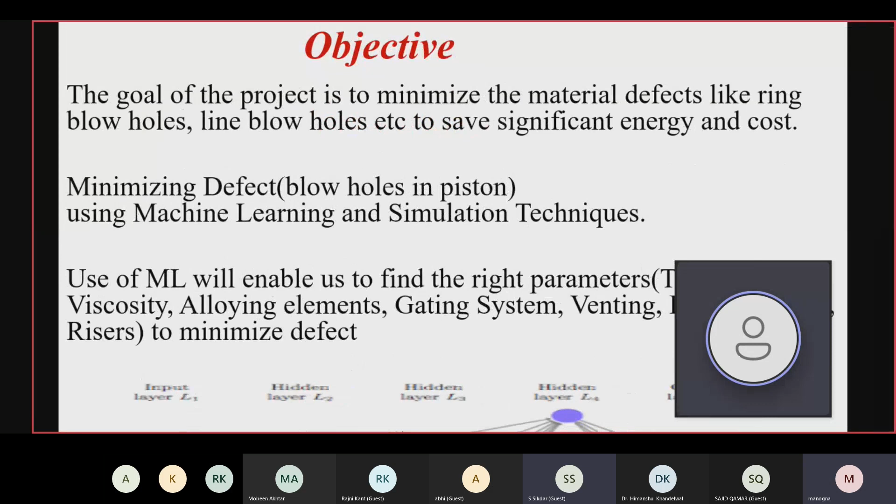So we have done the simulation techniques, and we have also used the machine learning part. In this we have taken into consideration the parameters: how many pistons are inspected, what is the scrap, what is the temperature content. We also considered things which we didn't include in the machine learning, the gating system, the venting angle and the tilt angle.

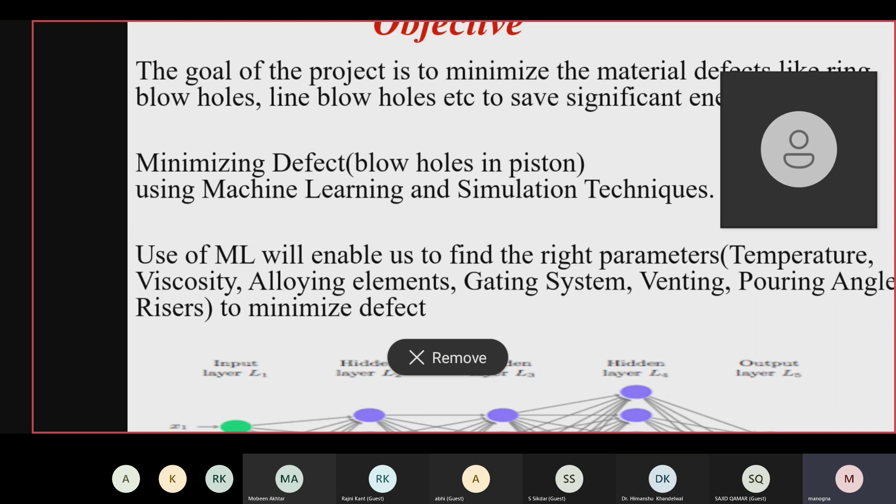We didn't include them in the machine learning part because the angle is set, and the gating system is also fixed at a particular position, so we don't change it every single time, but temperature can vary, and the scrap also varies. So that is why we have not taken the gating system and the tilting angle into consideration in the machine learning part. You can see this part, right, sir? Venting, pouring angle and all. No, actually.

Is it okay now? Yeah. So you can actually, I don't know, you can cross this, na? There is a cross button, I don't know. Now you all can hear my voice also. Yeah, we can hear you, we can see this presentation, full screen.

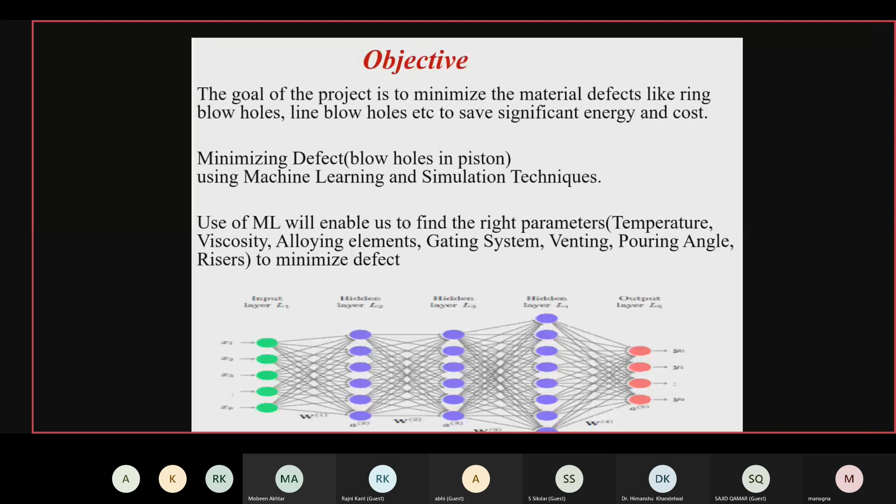Yeah, then that's fine. So the points which were considered for the machine learning are temperature, scrap, and inspection. The points which we have done in the Magma simulation are gating system, venting system, and the pouring angle. So as you all know, what is a piston? Piston is a component used in reciprocating engines. It is basically used in the cylinder parts. So it is also known as the heart of the engine.

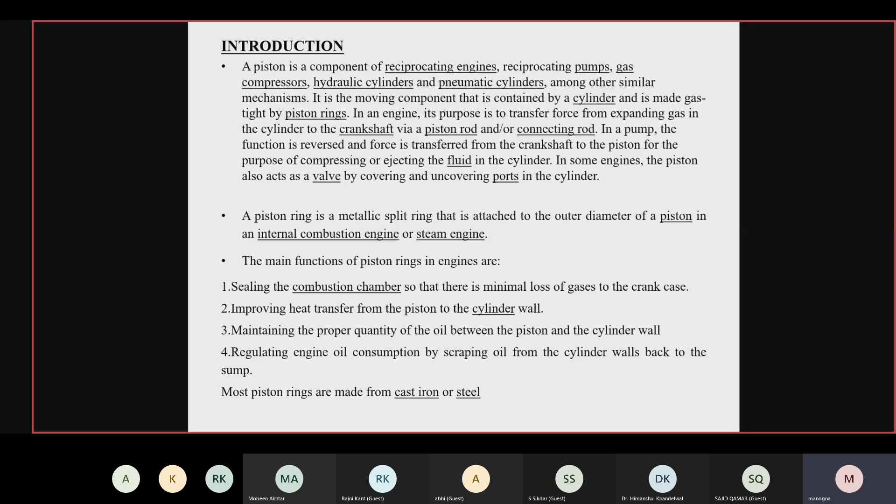So the place where we were doing this project on was the ring area. You can see this is a piston crown, sir, and I don't have a cursor to show, but at the top crown, the top compression ring, second compression ring, and the oil ring. These three parts are the rings where we are getting lots of blowhole scrap. Blowholes or the line defects, which are basically due to air bubble entrapment.

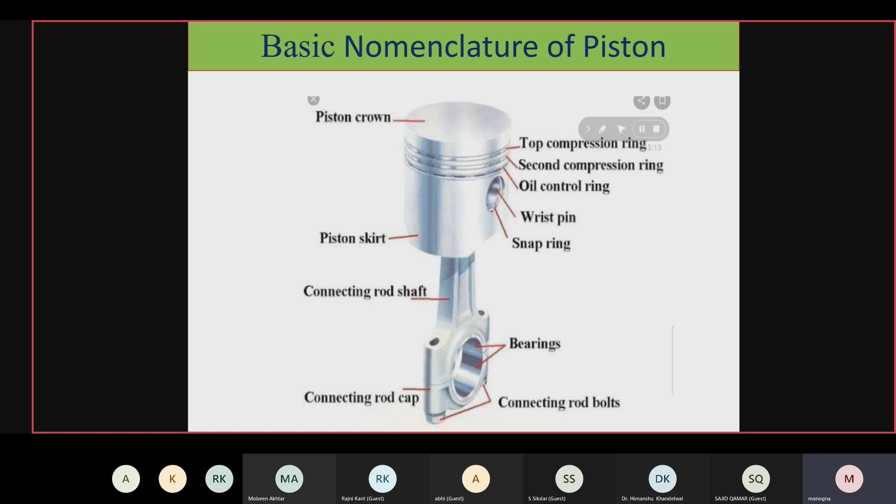So the alloy specification which we are using in this is silicon. Aluminium will be 60% to 80%. This is an aluminium factory. So 80% aluminium is used, and apart from that silicon, copper. So silicon will be in the second position.

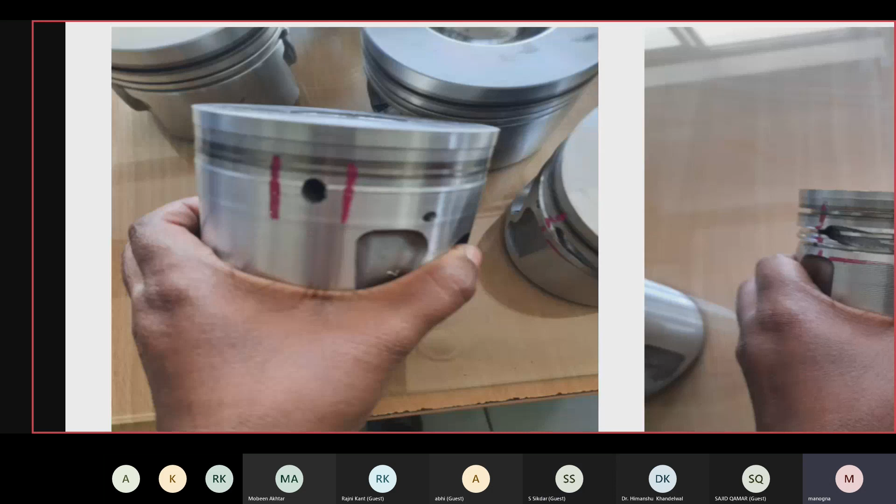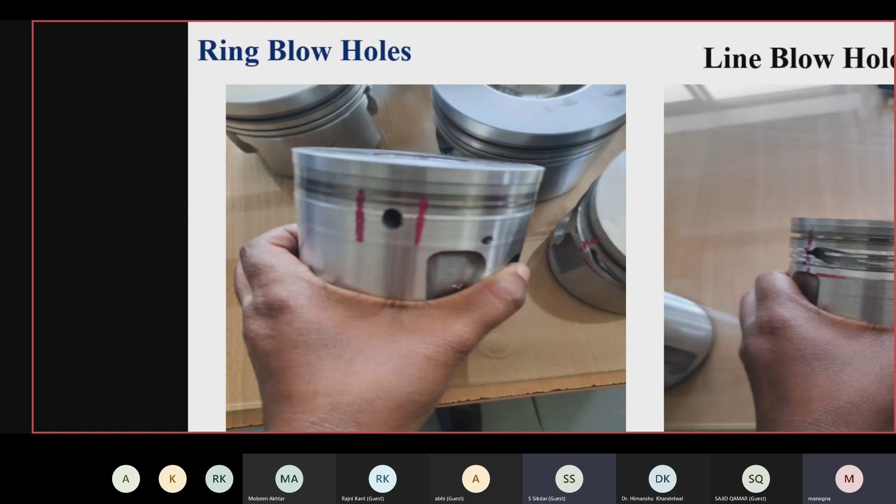In this, you can see the iron content is 0.8% maximum, and some of the pistons we get for 0.5 maximum. That is for a particular application, for tractors or small moving rovers and all. That's what I am trying to understand. So your data or samples you have collected contain a wide range of alloy composition. Iron can be 0.8 maximum, but it can be as low as 0.5, 0.6, or something like that. It can have various ranges.

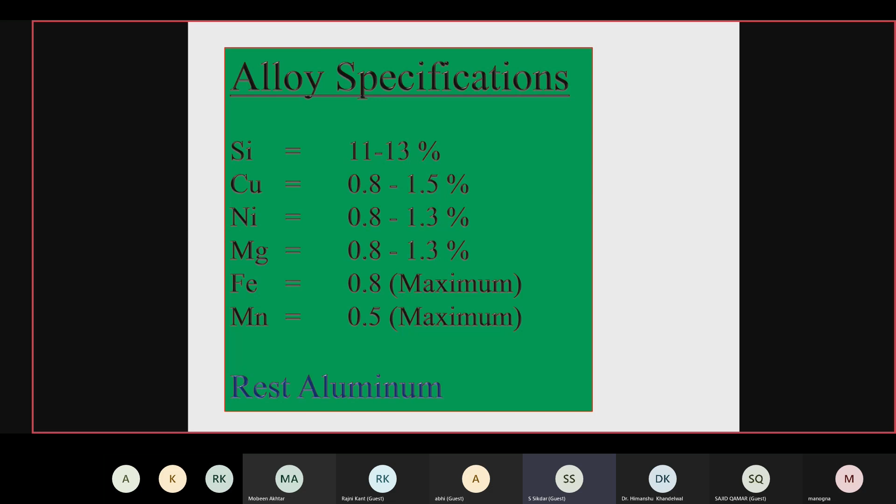Similarly, silicon, magnesium, manganese, all these will have different specifications, right? Yes, sir. It depends on the specification. This will be given to us by the customer himself. Okay, so for each and every data, all these compositions are given. Yes, sir. Okay, go ahead.

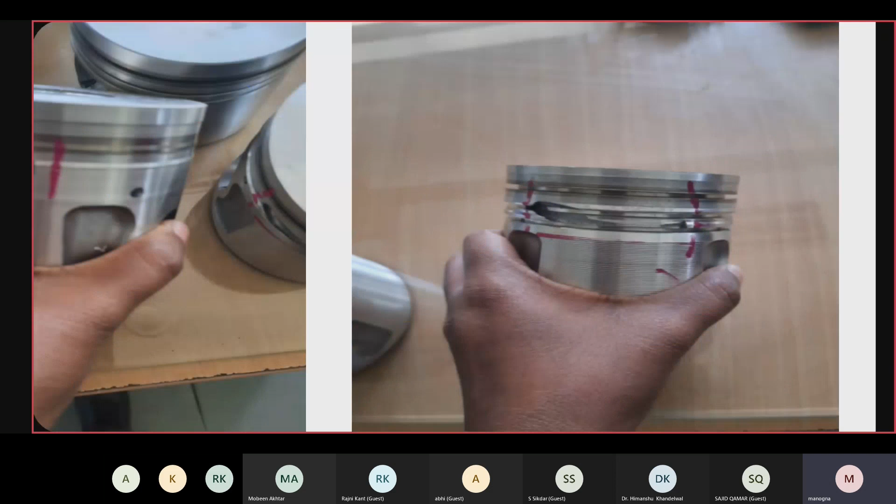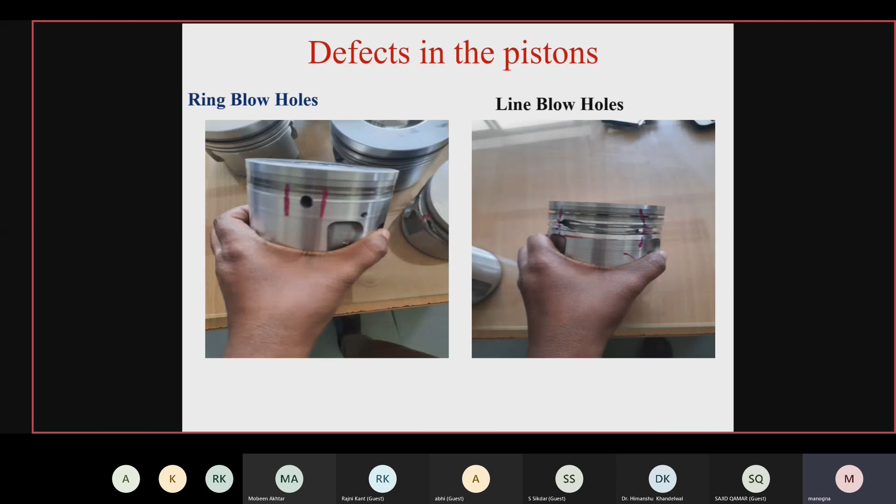So the first piston is a ring blowhole, and the second one is a line defect because it is in the form of a line, a curved line, as you can see. This is in the form of a blowhole. So this is the smallest one, ranging from that big to this small. These are the defects in the pistons we have observed, sir.

These are mainly due to entrapment of air while we are pouring. When we are pouring, the air can be entrapped due to fast pouring, or when the machine is tilted to a certain angle, there are lots of chances that the air can be entrapped at that position. If the gating system is very narrow, there are chances of getting a blowhole. So those are the particular points we have taken into it.

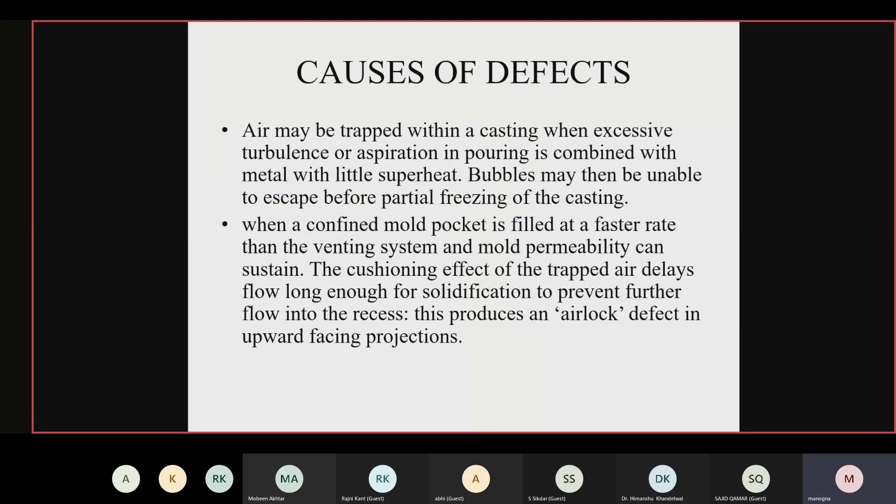So when a confined mold pocket is filled at a faster rate than the venting system and mold permeability can sustain, the cushioning effect of the trapped air delays. So then there will be an airlock in it.

So Meena, can you measure pouring velocity also? So that is the issue, sir. We are not measuring two types of things. One is moisture content and one is pouring velocity. Okay. Is there any methodology that exists to measure it, or does it not exist? We don't have it, but in the long run we are planning on putting that in. But as of now, we don't have that methodology.

But you don't have it, but it exists somewhere. Correct. In our plant, it doesn't exist. Yes, sir. But yes, it does exist elsewhere. Okay. Did you measure viscosity, or did you get the data of viscosity? No, sir. We don't have viscosity measurement. Even the hydrogen content also, we don't have how much hydrogen content is there.

So it was not a parameter in your analysis, was it? No, sir. We have tried to check it, but the measuring system was not very good, and we didn't get a very good measurement, so that was the reason we stopped it there. Yeah, that's not easy either. That's why I wanted to know whether you have any supply data or not. Okay, go ahead. Yes, sir.

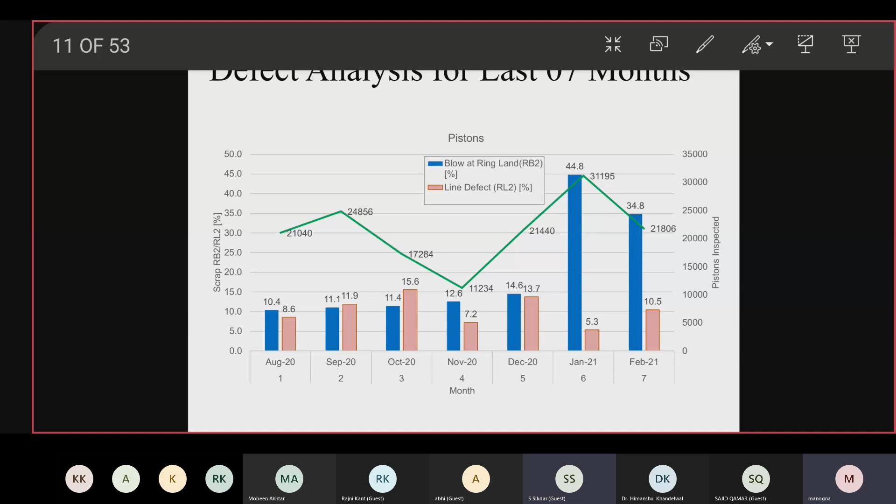And you can see the graph has increased. In the month of January, only 31,000 pistons were checked, and almost 44% is scrap. And in February also. So that is when, in March, we took up this project. What was the reason behind this peak in January?

One of the main reasons is the stopping of the machines, since, as you all know, there were very low orders in the DCM sections, the manual casting sections. Due to which all of our furnaces were stopped for a very long time. And once they were started, due to some of the scraping or the metal not attaining a particular temperature, we observed more than half of the pistons getting scrapped.

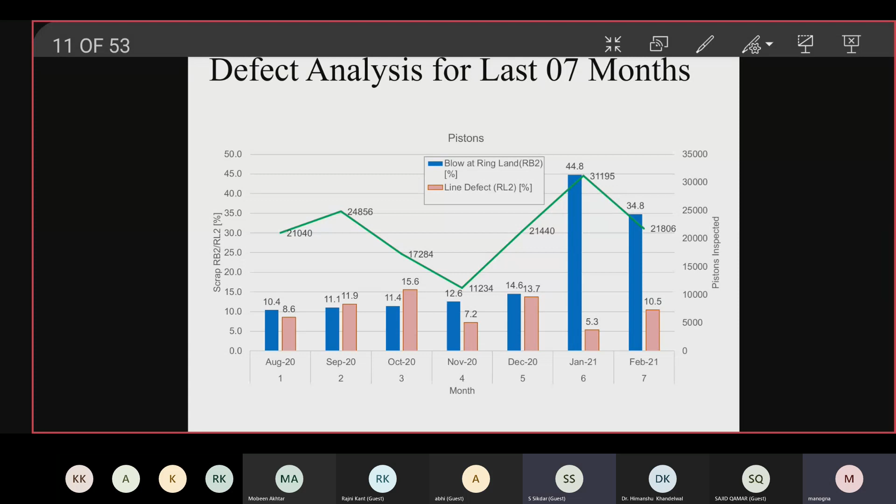Just hold on here. So it is seen in the month of February it dropped to how much? Is it 21,000, or more than 21,000? Inspected parts is 21,000. The orders we got were around 22,000 or 23,000. We inspected 21,000. Okay. But did you not take any other data in March or April or onwards in 2021?

Yes, sir. That is after the analysis part. We have kept it there. Because you cannot judge. What my point was is that you cannot judge if you do not see another two or three months of data. If you show that graph, then it would show the pattern of how the defect looks.

So till the month of July, we have the full data. Only the part till here we have taken into the analysis. We have analyzed this data and then we have taken this data and applied some of the measures. And then we have... what is it?

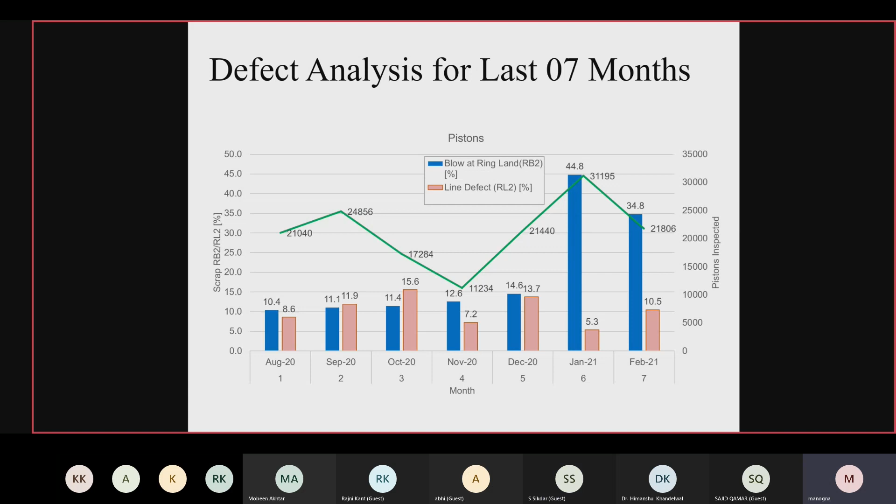My question is, in the month of March or April, did it drop or did it increase the number of defects? It has dropped. Initially, we have given some of the points. That means steadily it dropped. Okay. All right.

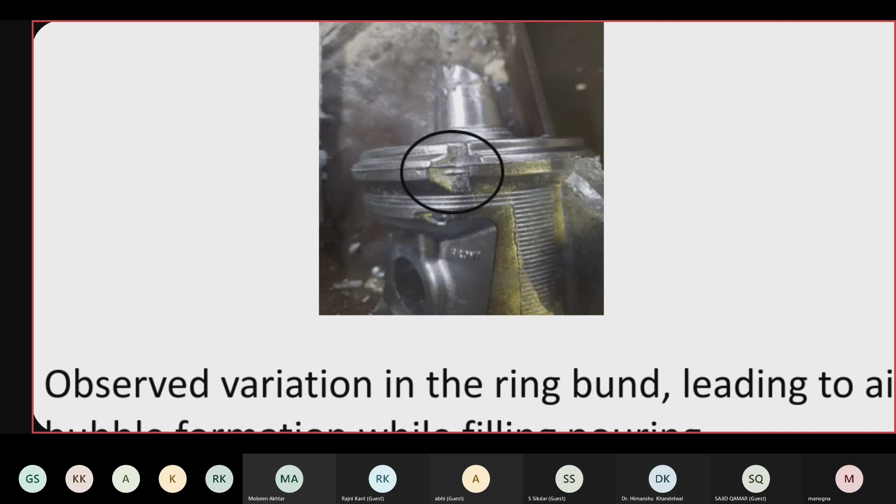So you can see here, the ring bund is in misalignment. So the upper part and the lower part are not aligned with each other. That is one of the reasons we are getting scrap. When we are pouring, the bubble is getting stuck there and it is not moving up.

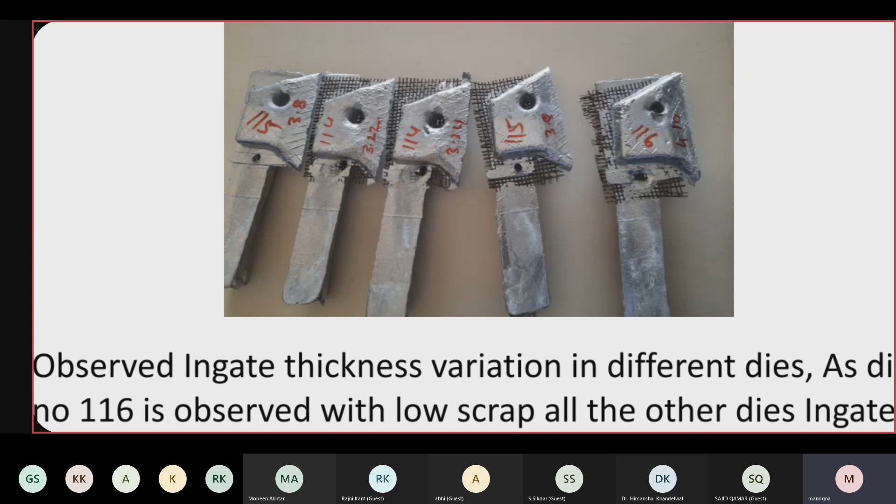And as you can see, this is the die-wise data. Our lowest scrap is in 116 and the highest scrap we have observed in 114 and 115. 116 has a much thicker, broader ingate, with 4.10 ingate thickness, and the rest are 3.8, 3.3, 3.2. So that is one of the reasons we changed it. This is the modification we did in the month of March. We asked them to increase the length of the ingate and also the thickness of the ingate area.

So this is how we did it from research. We took the hypothesis, and from here I've given all the data to the rest of my team members, Mobeen, Sajid and Rajnikant sir, to test with the experiment and analyze the data, and the conclusions we have given to my company.

So this is the agenda, to have zero defects, because especially in foundries, people work at 700 degrees centigrade. It is not easy to work there. So whatever scrap they produce, at the end of the day, they will be accountable for that also. Their salary gets deducted. So that is our focus area, to reduce the scrap.

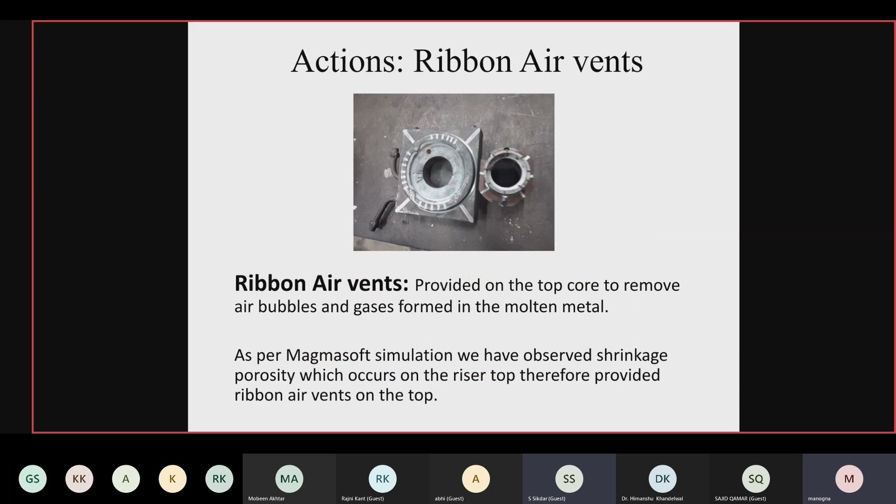So what we did is, in the die, we have given ribbon air vents at all positions, at 11 o'clock, at 10 o'clock, at 9 o'clock, to get good venting, so that the air bubble which is formed in the die itself gets removed.

So we'll come to the actions taken part in the next area. So I'll ask my teammate Mobeen to next start with EDA.

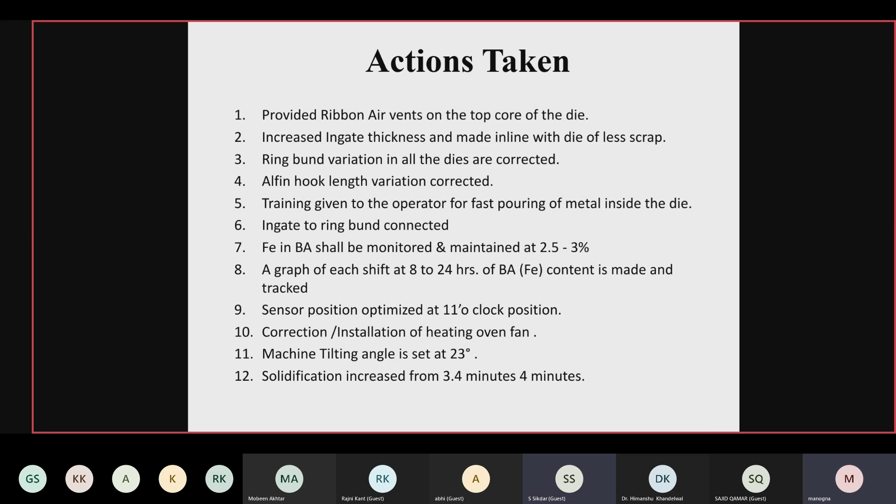But how do you come to the conclusion that air bubble is the reason? I mean, from the analysis or some other way? No, sir. This is a blowhole. This is not an inclusion, from the measurement of the part and also through the microstructure. We have seen that it is an air bubble formation and it is a blowhole. So we have taken into consideration that blowhole is due to air bubble formation. That is how we have concluded.

Mobeen, please, can you start with the exploratory data analysis? Yes. Next slide, please. Okay. Yeah, please continue. Okay.

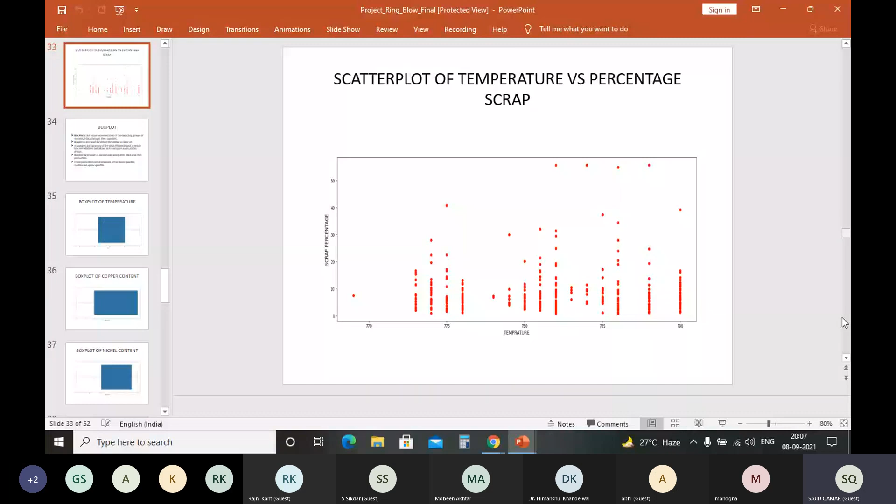You need to wind up in the next 15 minutes so that we can have another presentation. So I think inspected quantity should not be present in the model. But yeah, you just present whatever you have done. Sajid, go on. Now you carry.

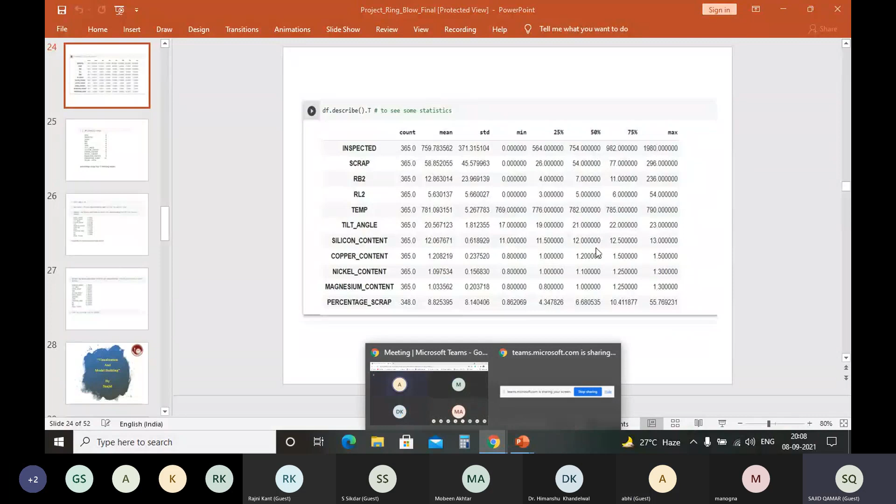Please put this in projection. Okay. Can you see the screen, sir? No, cannot. Now we can see your screen. Please go ahead. Okay, sir.

So we have checked the skewness and kurtosis. Skewness I have done with the lambda function applied on the num feature. For num feature I have already created an object by df.select_dtypes. And as you can see, some of the columns have a value more than 1. If the value is more than 1, then it is positively skewed or right skewed. If the value is less than -1, it is left skewed or negatively skewed. If the value is around 0, it's symmetric.

So as you can see, RL2, percentage scrap and RB2 are right skewed. What is this RL2 and RB2? Ring blowhole. What is RL2 then? These are types of blowhole. Sir, RB2 is ring blowhole and RL2 is ring lines. And what is ring line? So both are defects only, na? Yes, sir. RB2 and RL2 are also defects.